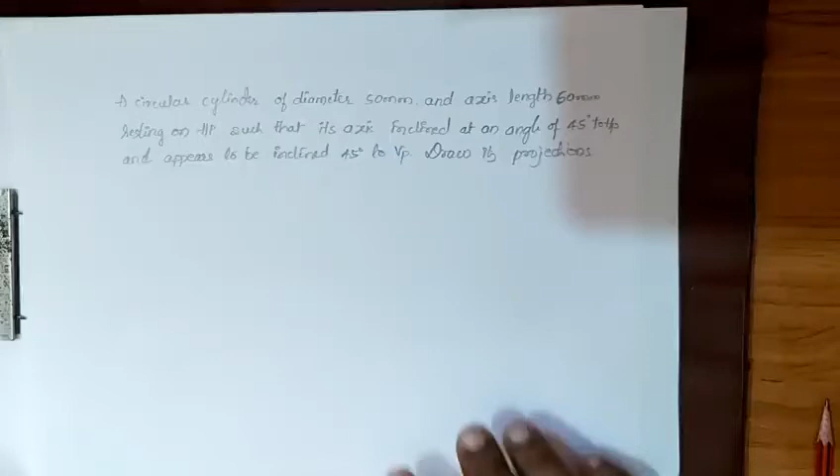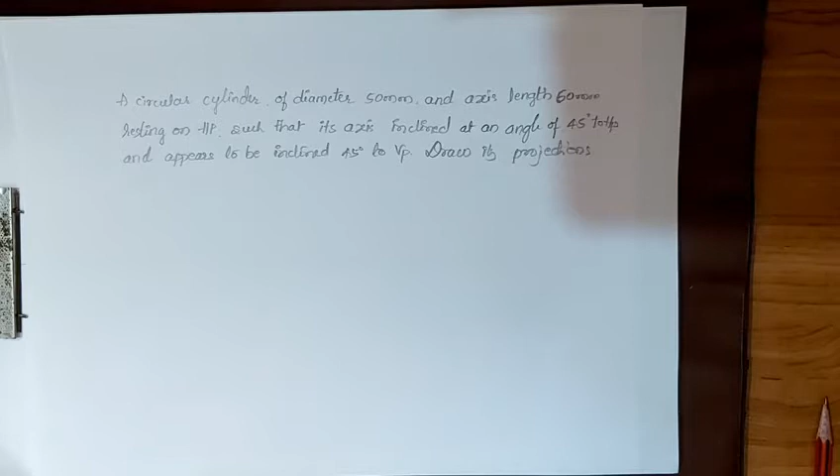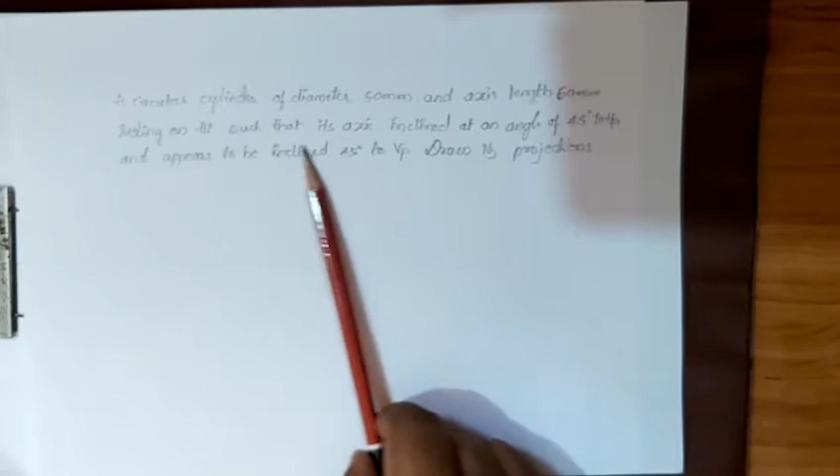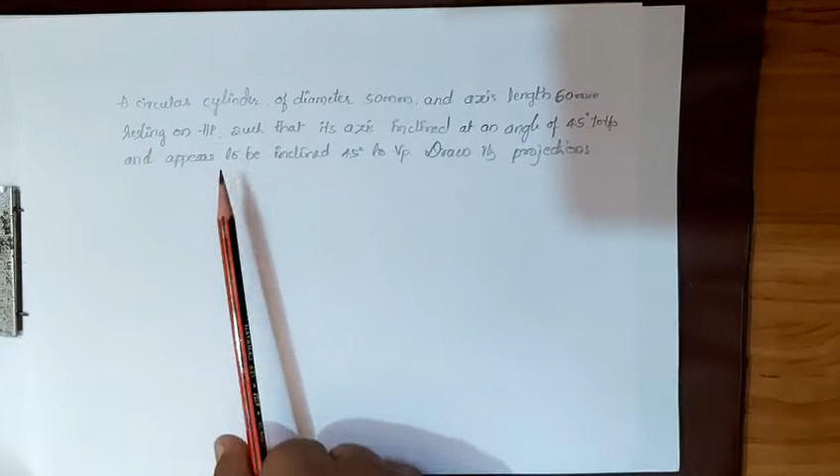A circular cylinder of diameter 50 millimeter and axis 60 mm is resting on HP such that its axis is inclined at an angle of 45 degree to HP. Since it appears to be inclined, we will not get a locus line, so we will draw this circular lamina with the help of a sketch.

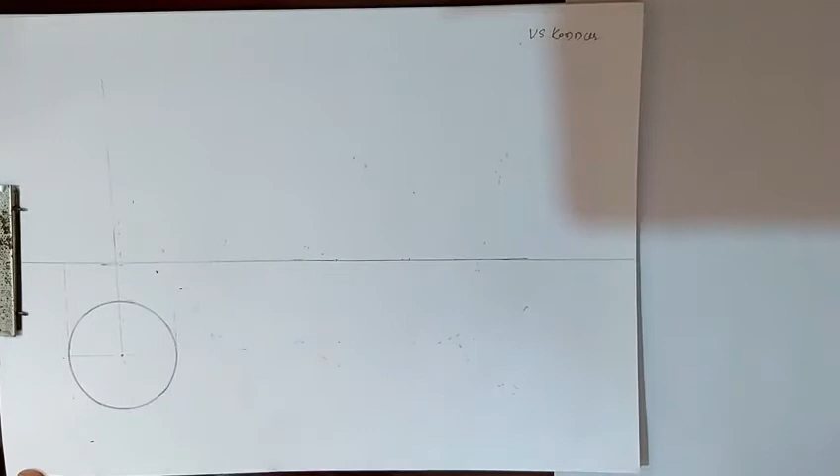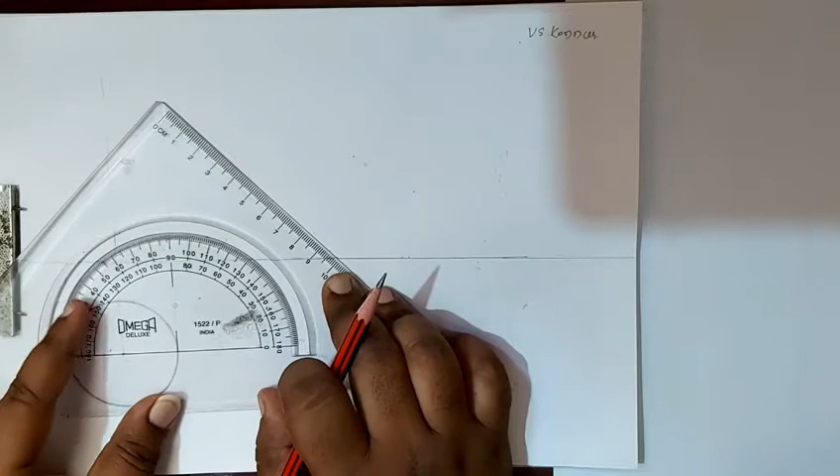Now we take a 50 mm diameter circle and take projectors from all the points. Before that, we will divide this circle by 90 degrees into 4 parts, each part having 90 degree.

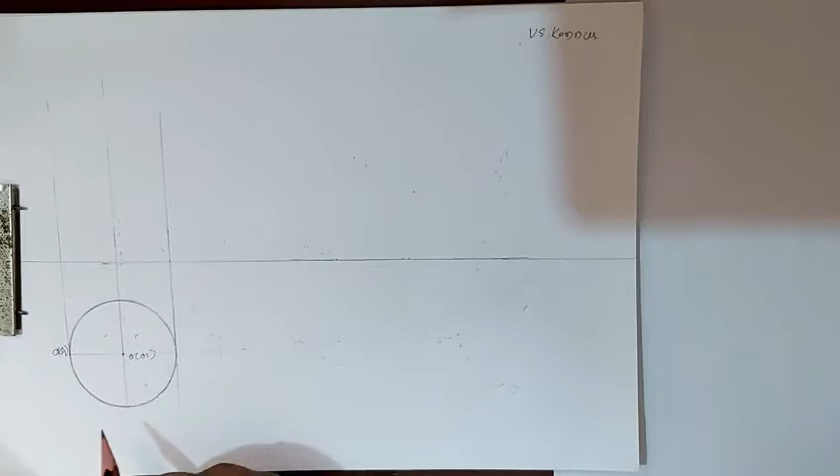Now we will name the points AA1, OO1, BB1, CC1, DD1, having a diameter of 50 millimeter. Then height is 60 mm, so we'll take height as 60 millimeter.

You can divide it by divider, or you can take it with the help of a scale.

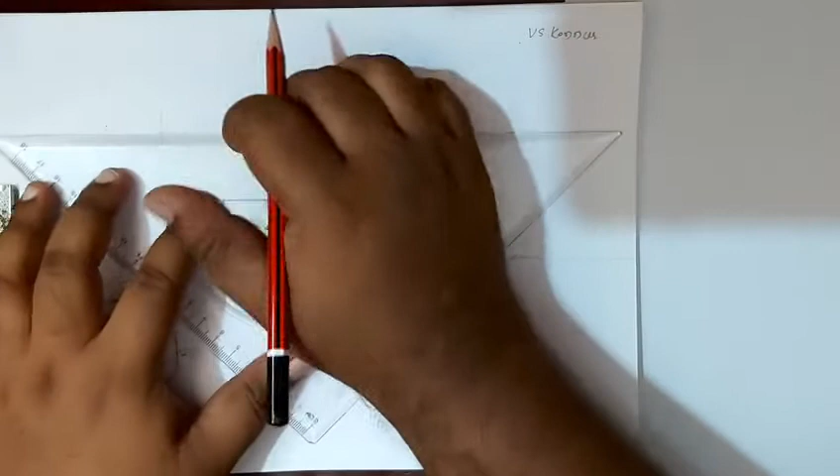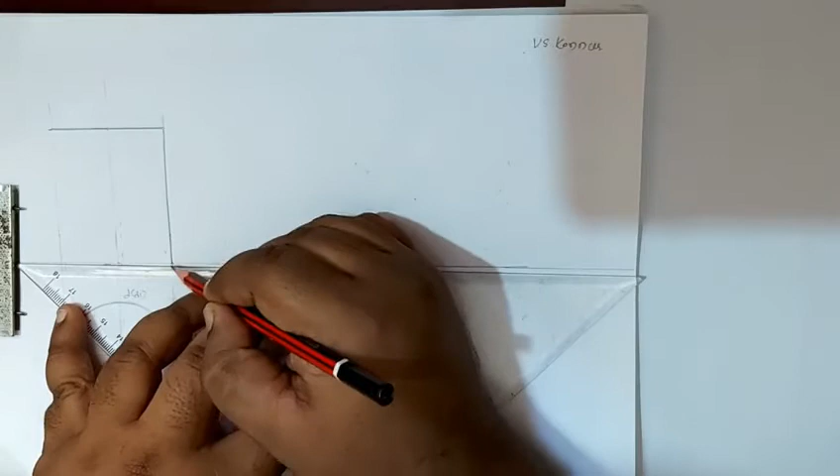Only the border will be made dark, because the cylinder does not have any edges — we are taking construction lines. These are not edges, we are taking construction lines.

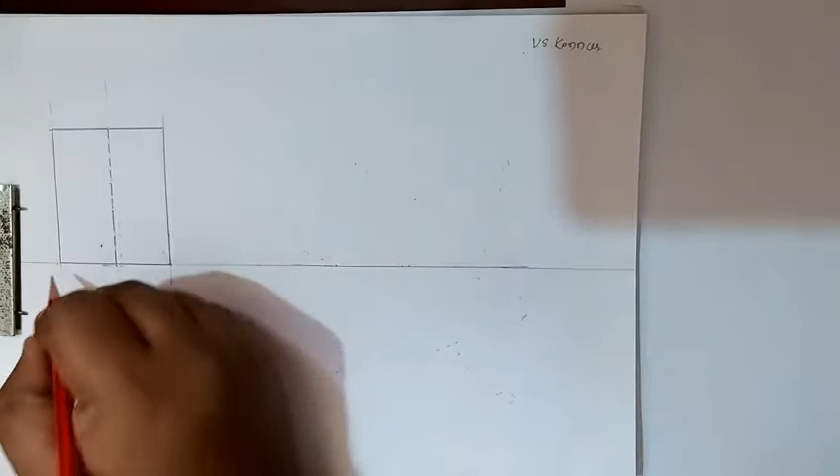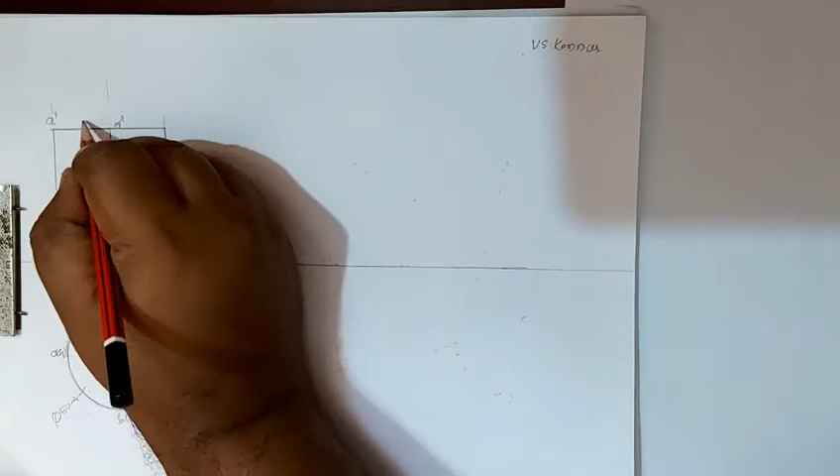Because of that, only the border will be made dark, and A1 is there. We will give arrow marks. This is A1 dash, this is A dash, O1 dash, O dash. Along with that, B1 is there, B1 dash in bracket D1 dash which is not visible, B dash, D dash. This is C1 dash, C dash.

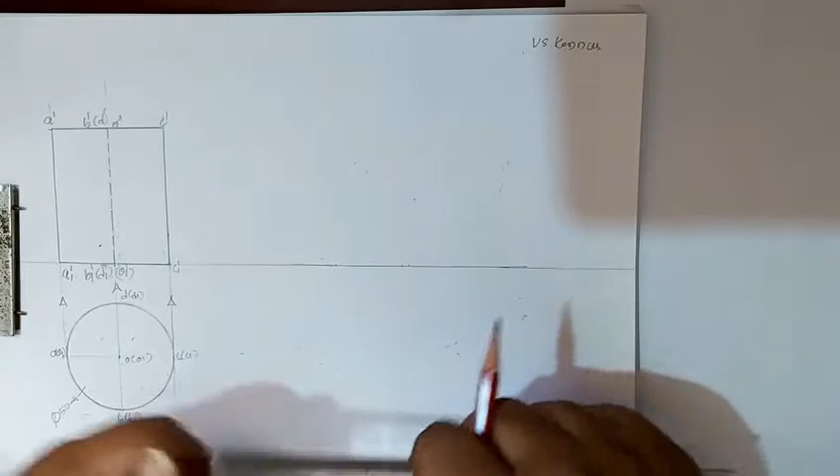Next position: the axis is inclined at an angle of 45 degree. Base inclination is also 45 degree, since 90 minus 45 is 45 degree. Now we'll mark it.

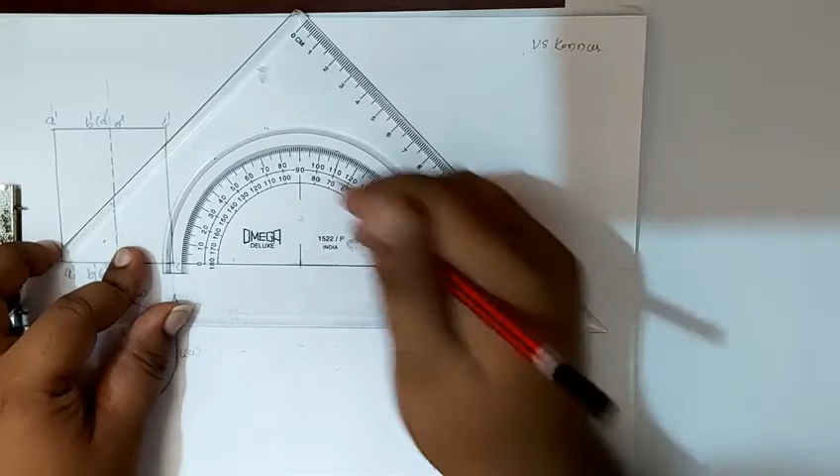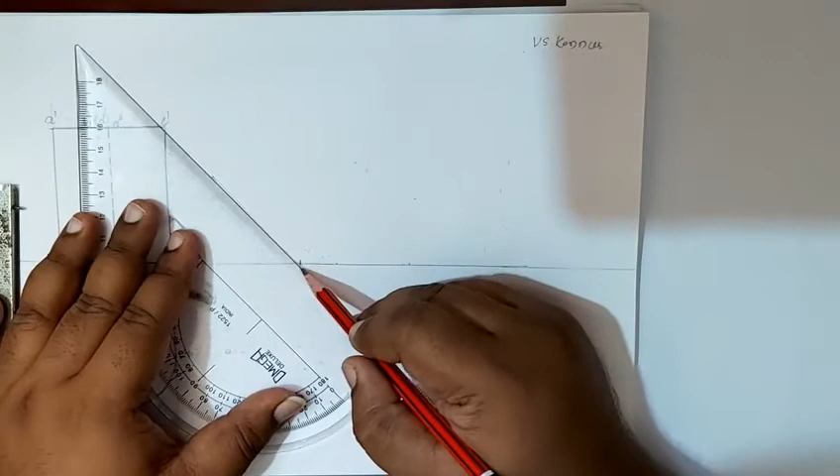I will take 45 degree from this point, taking base inclination as 45 degree. With a thin line I will join — with a thin line you have to join this 45 degree line, and then this point is called C1 dash.

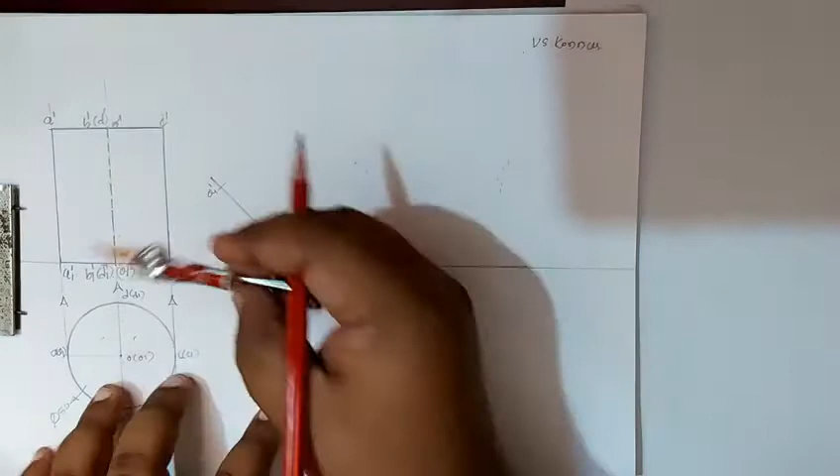Next we'll cut it by the C1 dash to A1 dash distance. By keeping at C1 dash, cut it by the A1 dash distance, and also take another distance for B dash, O1 dash. So all the distances are same. This is called O1 dash, or can be called B1 dash.

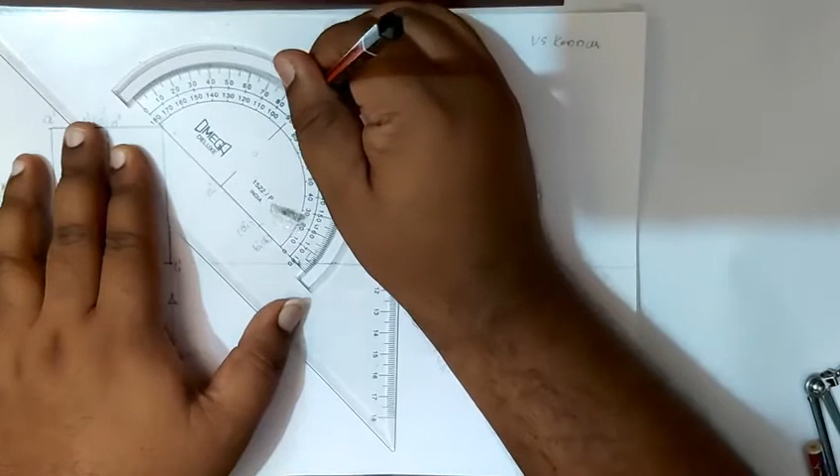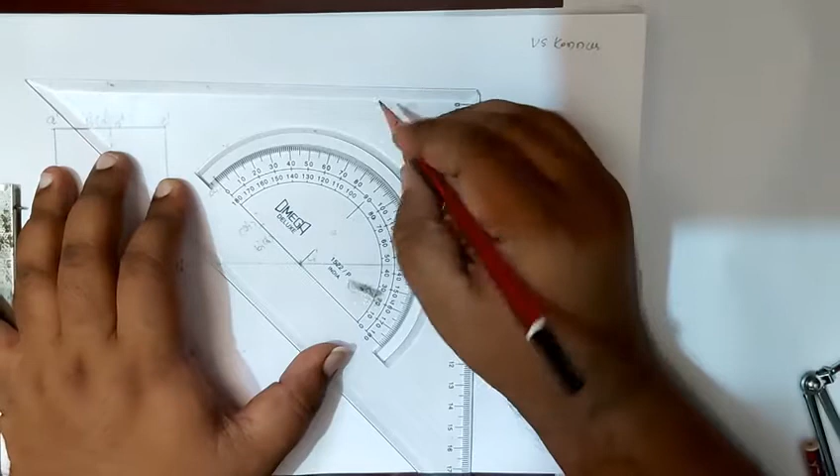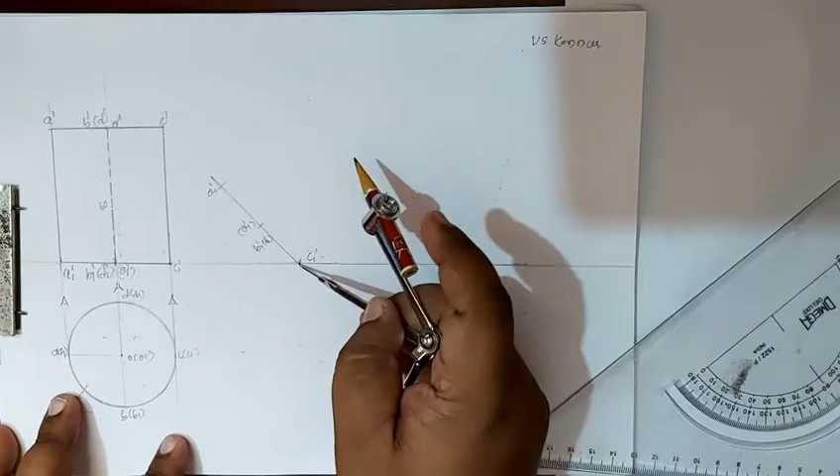Now we'll take 90 degree from all the points. Next we'll cut it by 60 millimeter height — this is 60 millimeter height, so we'll cut it by 60 mm height. Now we'll take the distance 60 mm and on all sides cut a 60 millimeter arc.

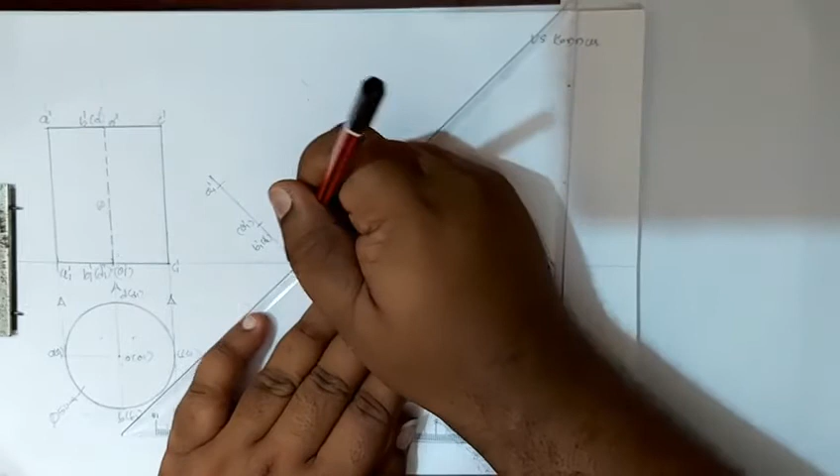And then we'll draw the line through this 90 degree, drawing till this arc.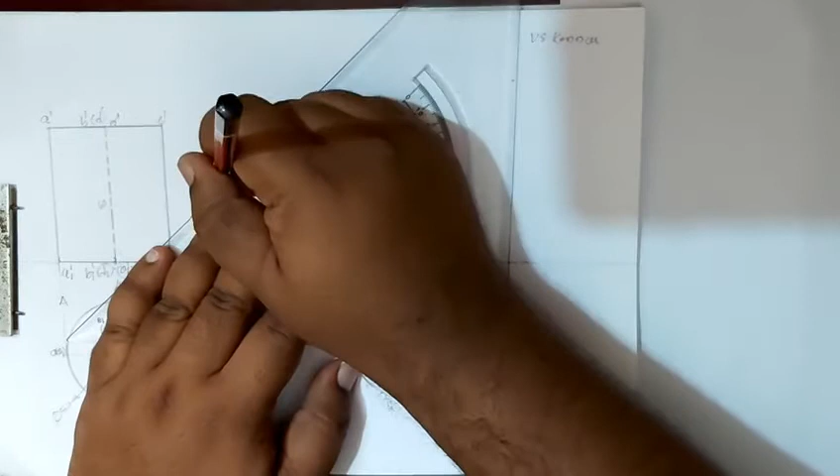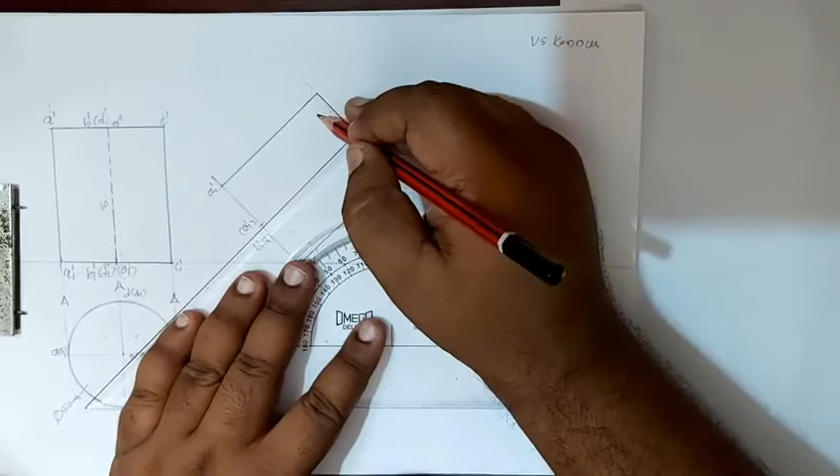Then we'll join these two points first, then take this line, then we'll make this base dark.

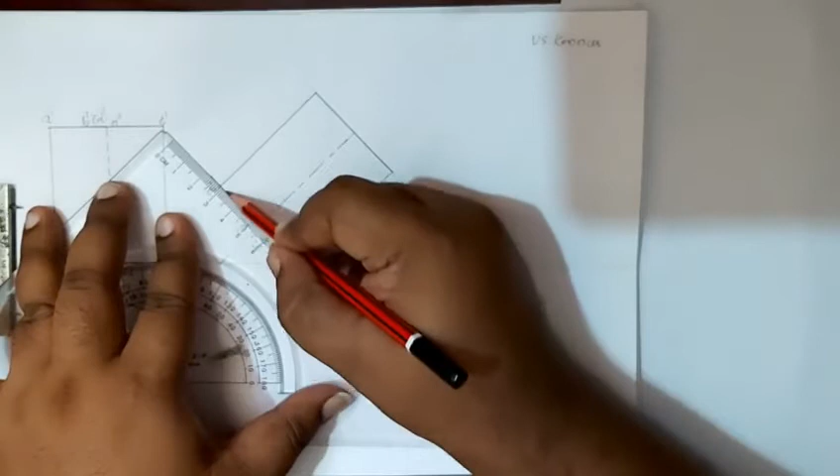This I have taken as 45 degree; 90 minus 45 degree will give us the axis inclination of 45 degree. Now we'll check whether we got 45 degree or not — there may be plus or minus error. So we got exactly 45 degree.

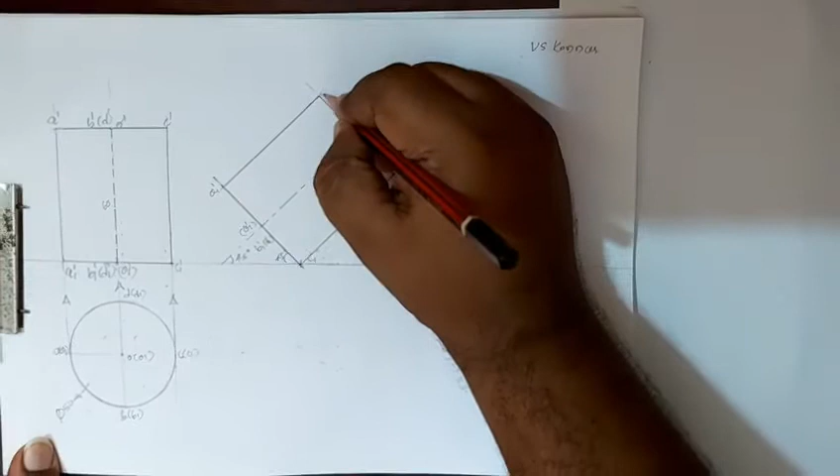We should get 45 degree, and this is A dash, this is O dash, B dash, D dash, C dash.

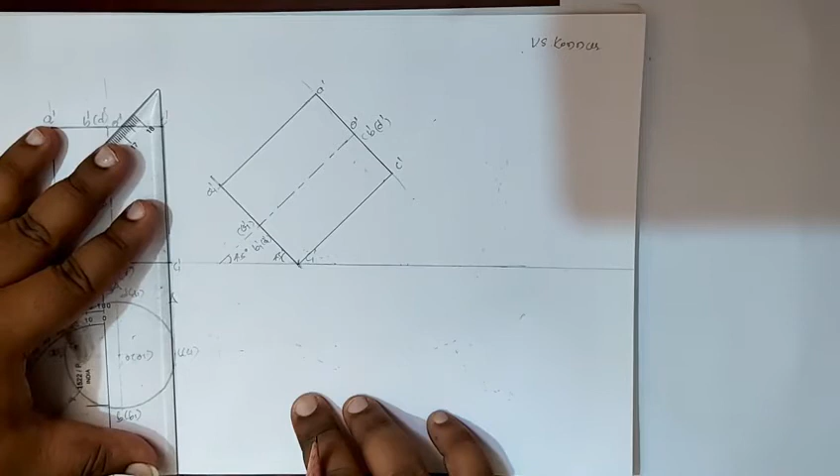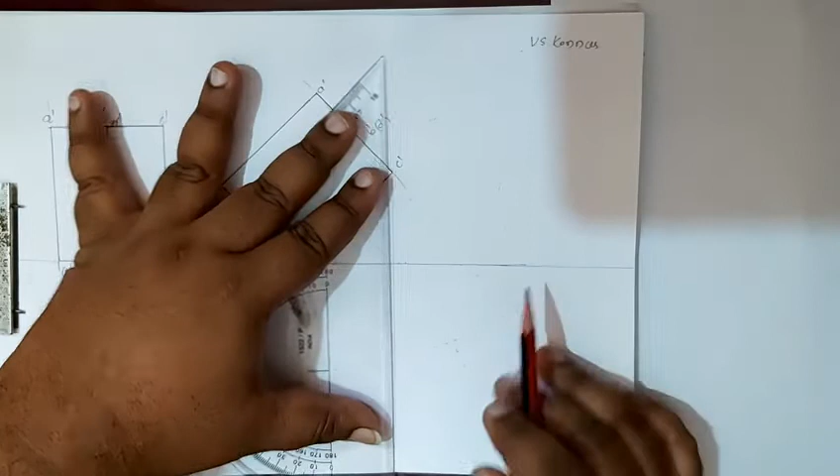Now we'll draw the projectors from all the points, and also draw in the vertical direction parallel to this.

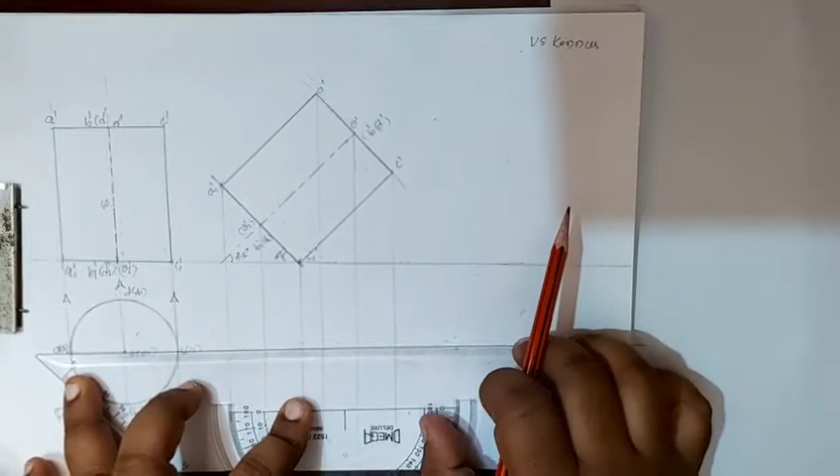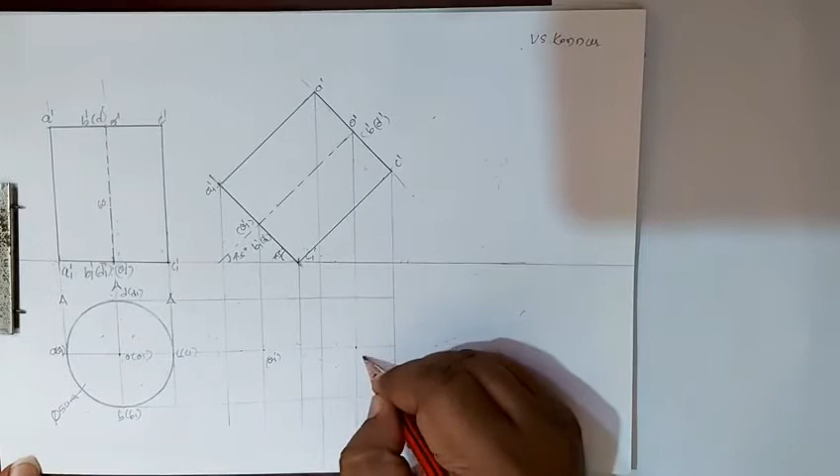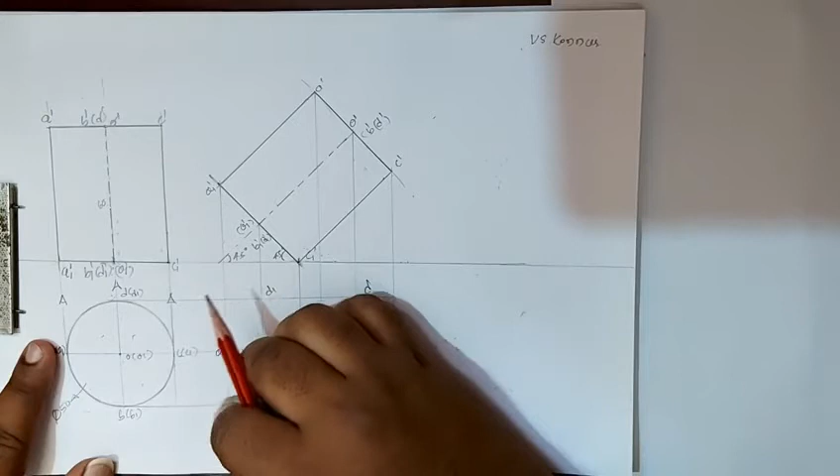Now this point is called O1 dash, this point is called O dash. Here we will get A1, B1, C1, D1, and this is A, B, C, D. So there is variation. Now we got all the points.

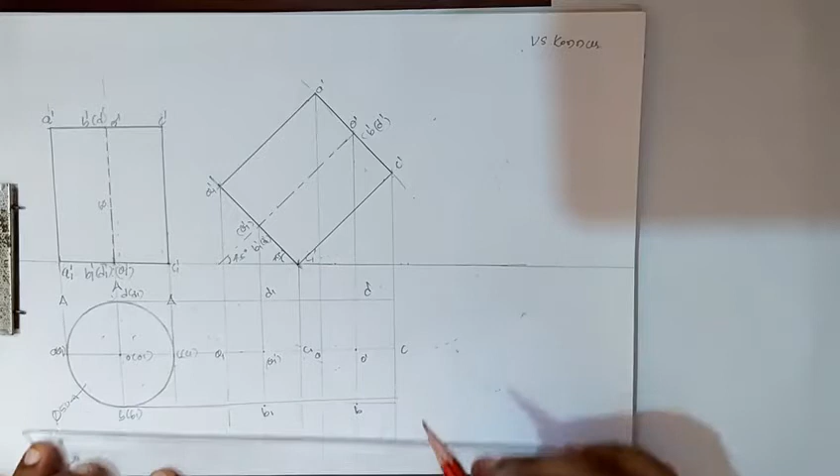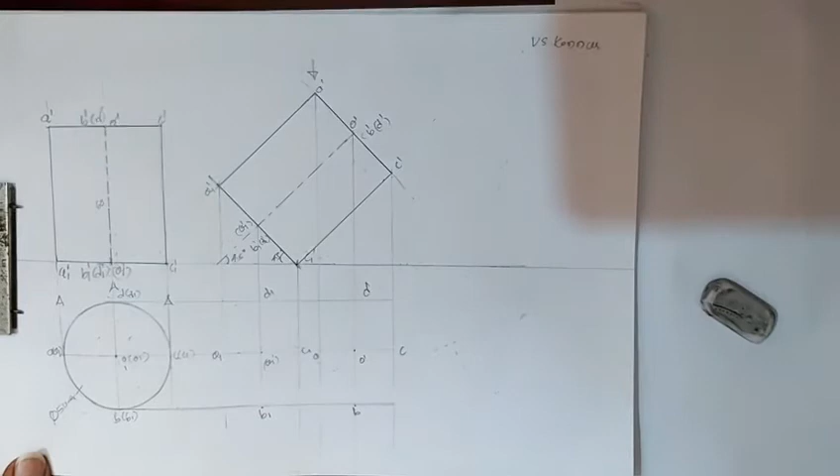Now we'll draw one more time. The point which is away from the observer when viewing from this side is C1 dash. Here the C1 point is here. The line joining to this point is a dash line.

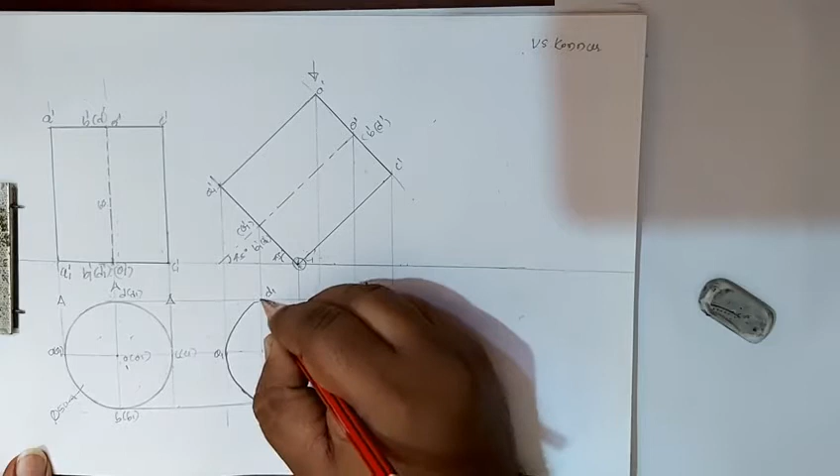That is nothing but we'll get an arc here, we will not get — so this arc is dash. Then another arc will be drawn, so this is not an arc; we have to draw it as a freehand sketch. Next from here it's continuous.

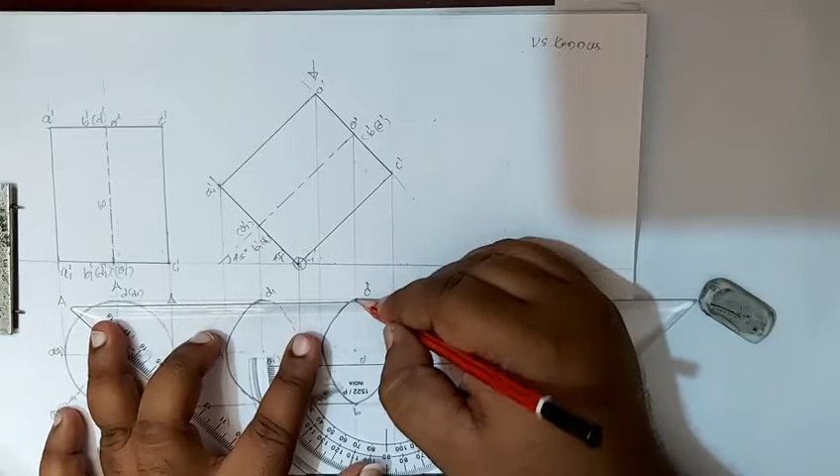And from point A to D, only that part is dark. Then we'll join B to B, D to D. Because other edges are not there, so we have to draw an arc and give the arrow marks.

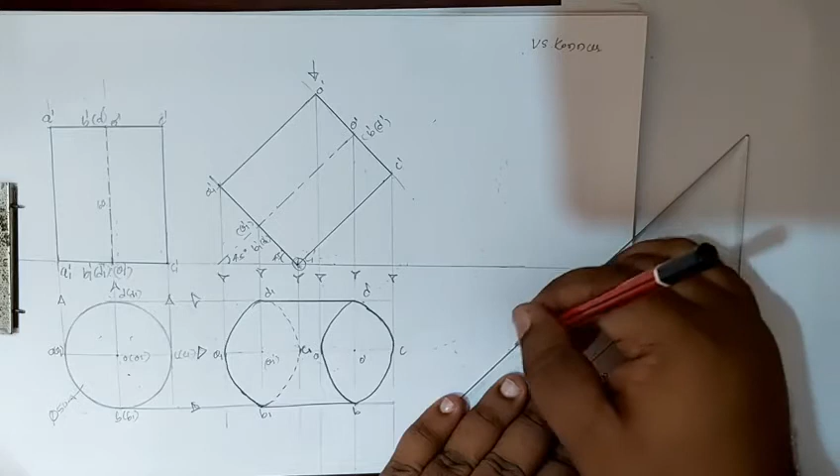In the third position also, this O1 appears to be inclined. Because of that, we'll take a 45 degree line from this point, and then we'll mark the O point here.

We'll cut it by the O1 distance, here we'll get the O1 point. And then we'll take other points — O to D I am taking, or you can take O to B, O to D, O to B, and also O to D, O to B.

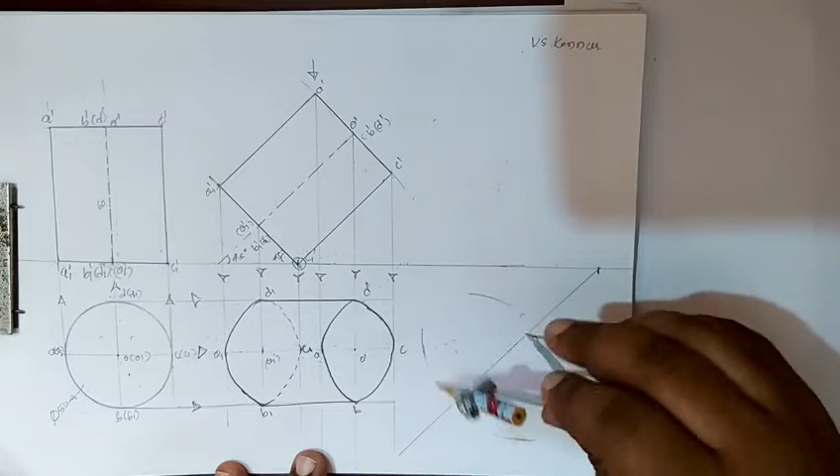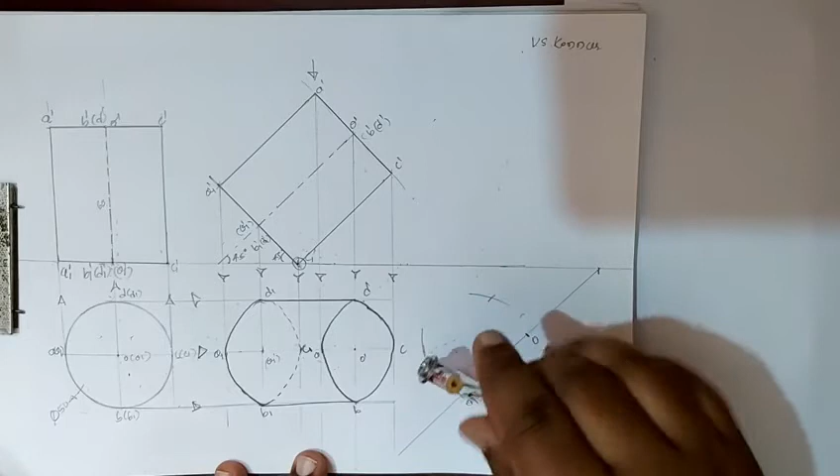Then we'll take O to D, you can take O to D1, all the distances will be the same. We got 4 points — this is D1, this is D, this is B, B1, this is B.

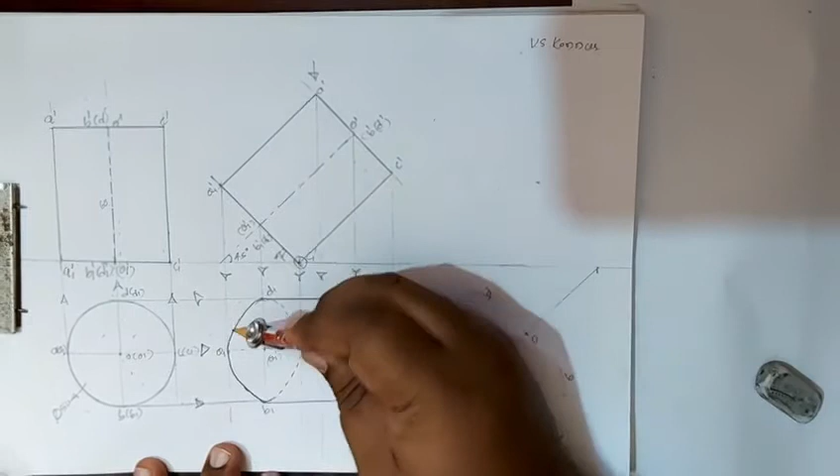Now another 4 points — we'll take the distance C to O1, or you can take O1 to A1, or C to O, the distance will be the same. Now we'll draw an arc on all sides, keeping the point at O.

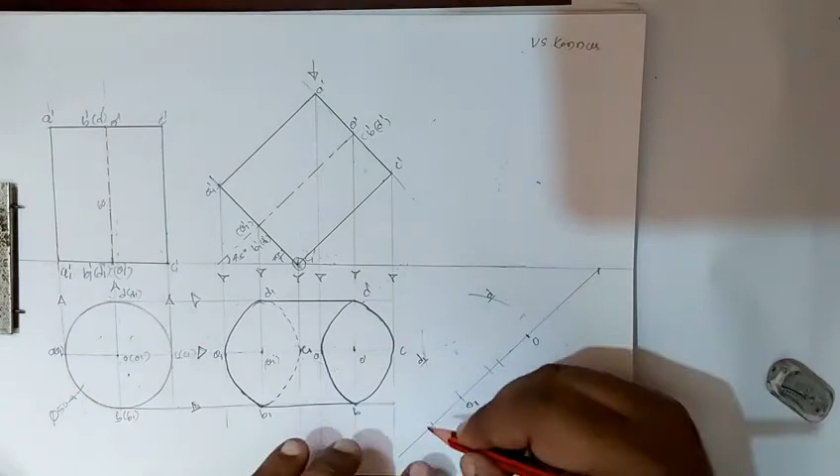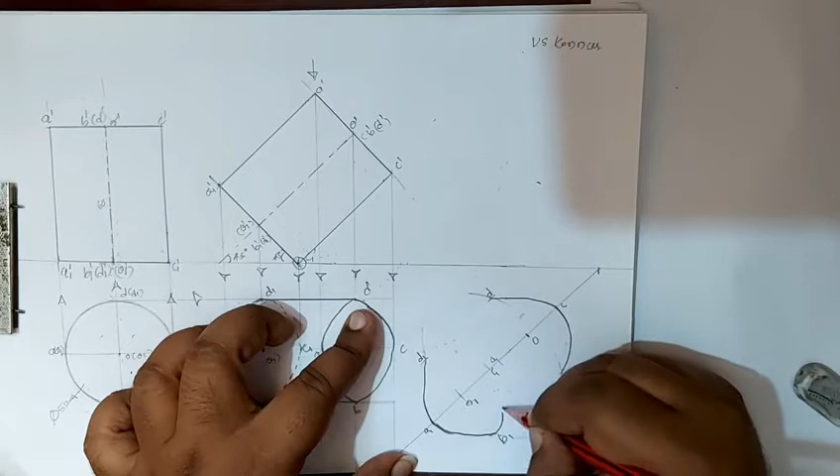Now this point is A1, this point is C1, this point is A, this point is C. Now we'll draw the arcs, and then join D to D1, B to B1.

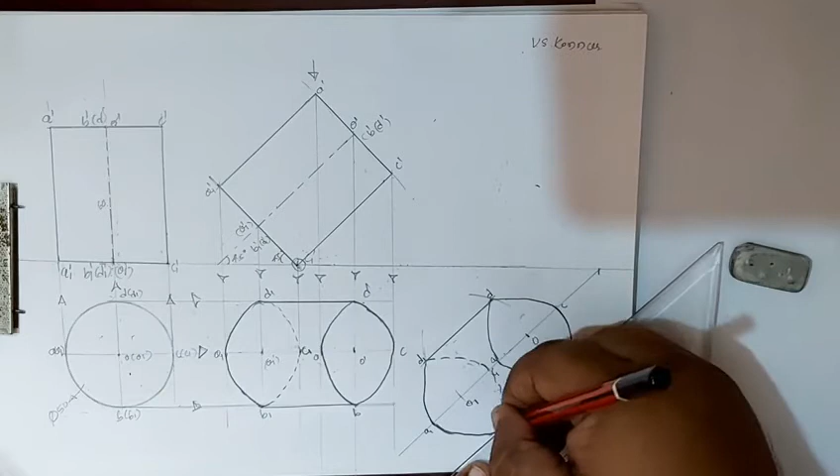The third position will be difficult to draw, but still we'll try. It is 45 degree. Now we'll draw a projector from all the points.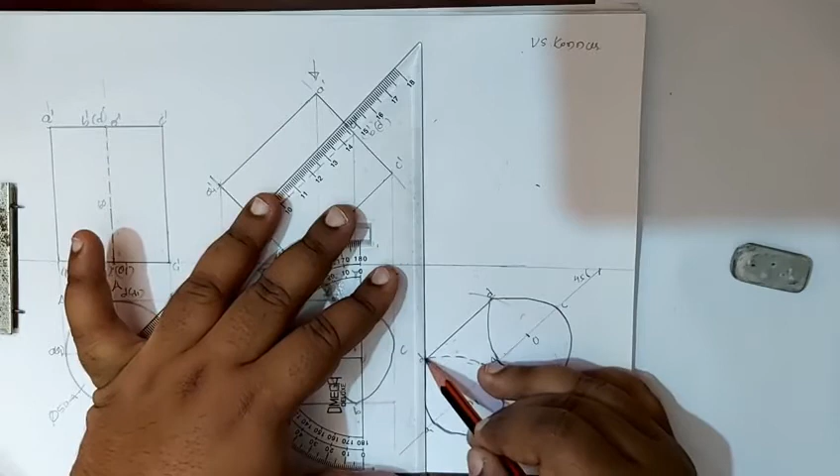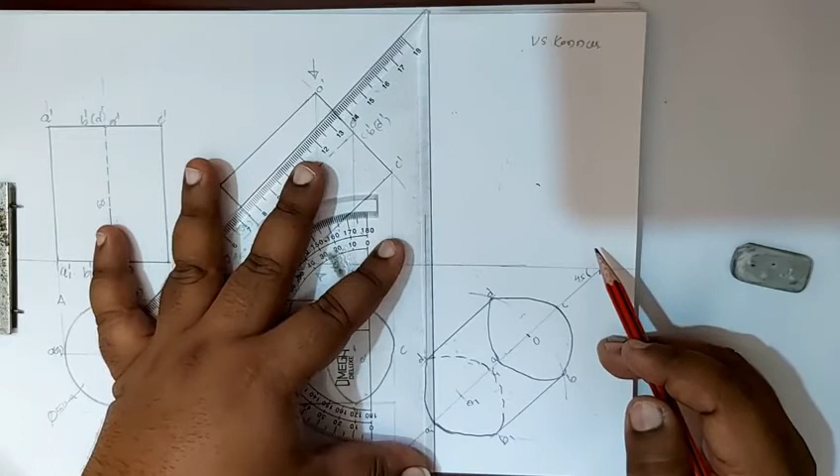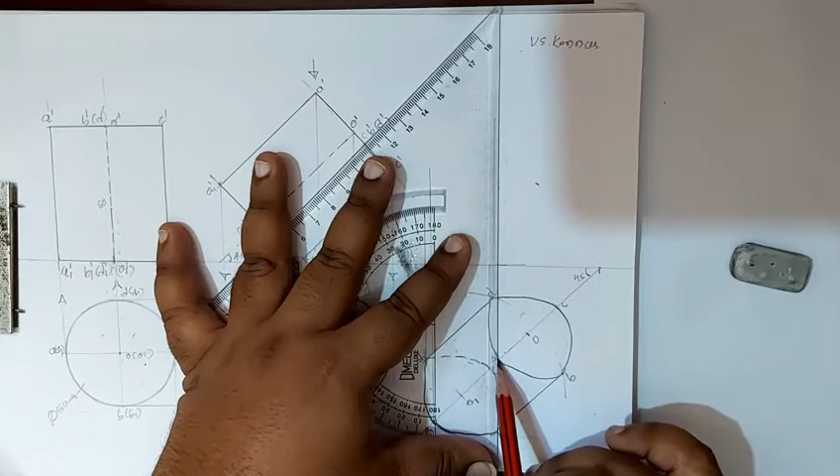D1 is there, till here we'll get A1, C1, D1, so this point is C1 dash.

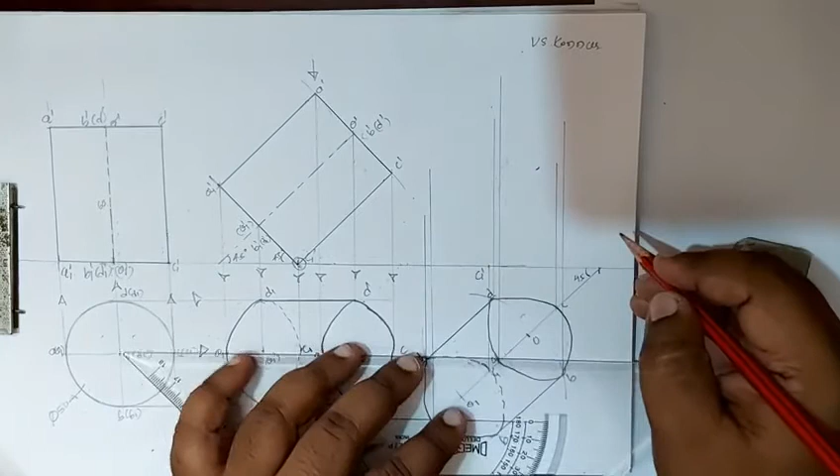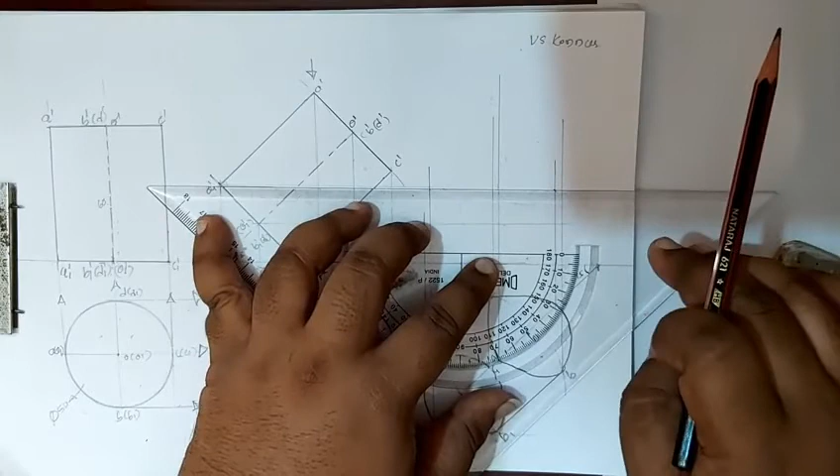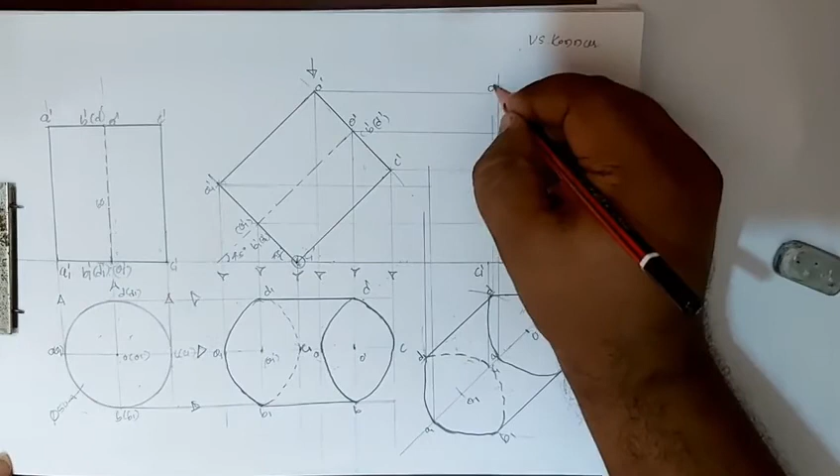Now we'll draw the projector in the horizontal direction. So we will get all the points. This is A point, A dash. Next this is B point, B dash, C dash, D point, D dash. C1 dash is there.

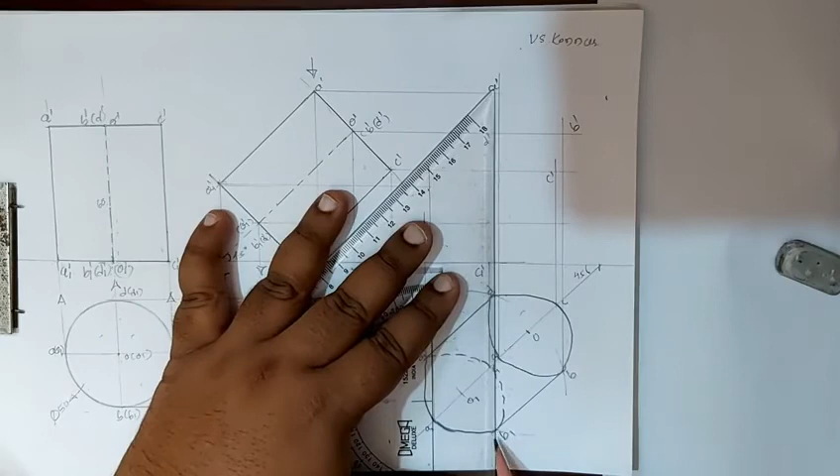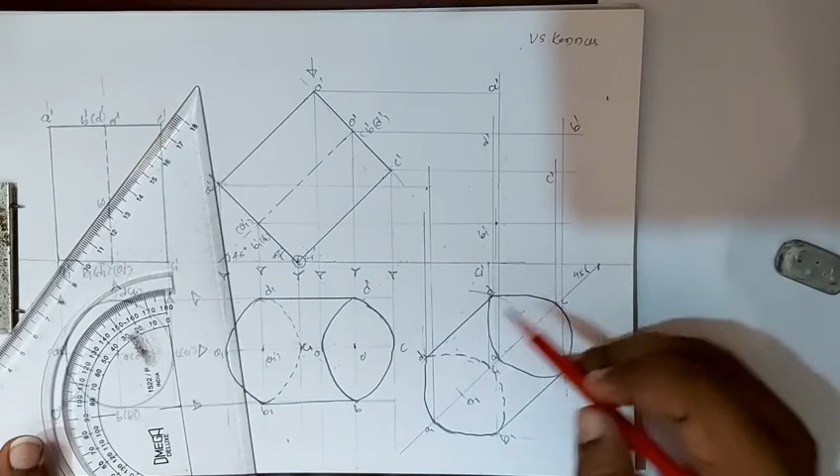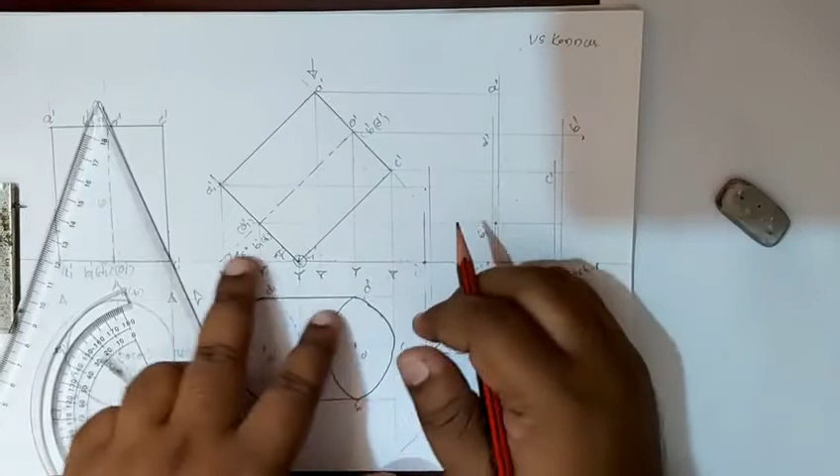Next, one more line I have forgotten — we'll draw B dash, B1 dash. C point, C dash, C1 dash — sorry, this is D1 dash, C1 dash, B1 dash, and this is A1 dash.

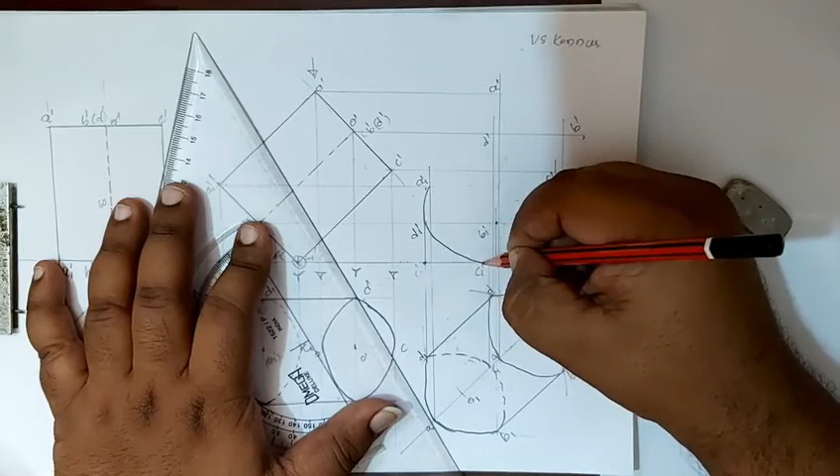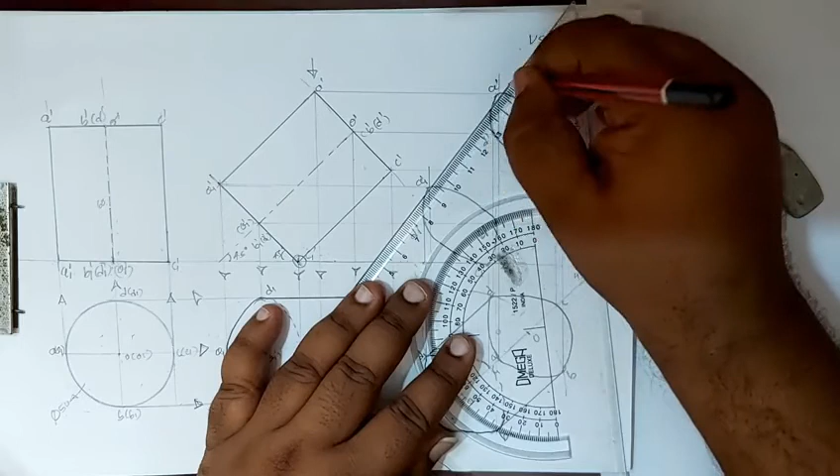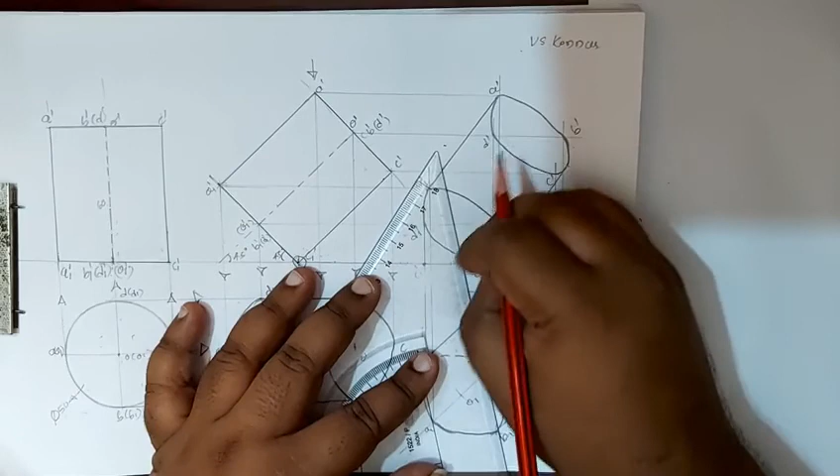Now we'll draw a curve so that all the points pass through it, and then we'll join the tangents. So it should be an arc. It is difficult to draw here, but still this is the third position.